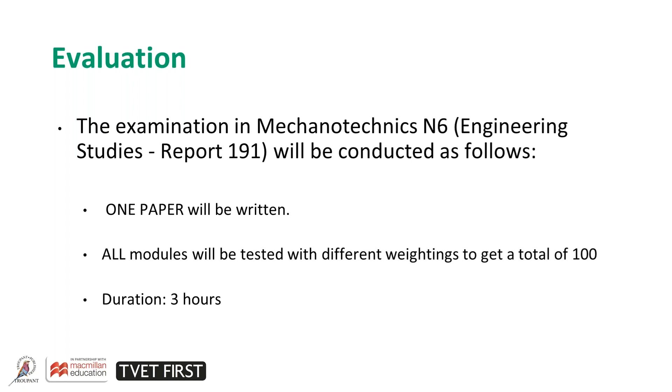In terms of the weightings of cognitive levels, questions will include recall, comprehension, application, analysis, synthesis, and evaluation of all the learning content. These are important aspects in determining a student's knowledge and understanding of the new curriculum.

The following weights are consequently awarded to each category. Knowledge and understanding will count between 10 and 25% of the total marks. Application between 30 and 40% of the examination mark. Analysis, synthesis, and evaluating will count between 20 and 35% of the total marks.

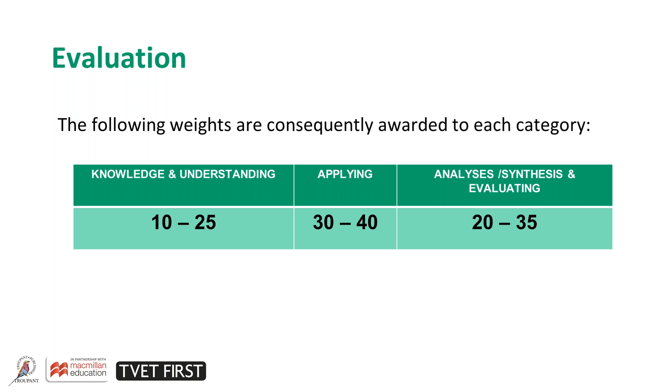At this juncture, I would like to take a minute or two to cover the basic workings of Bloom's taxonomy. This is very important to both learner and educator. In one sentence, Bloom's taxonomy is a hierarchical ordering of cognitive skills that can, among countless other uses, help teachers teach and students learn.

The framework was revised in 2001 by Lorin Anderson and David Krathwohl, yielding the revised Bloom's taxonomy. The most significant change was the removal of synthesis and the addition of creation as the highest level of Bloom's taxonomy. Being at the highest level, the implication is that it represents the most complex or demanding cognitive skill, or at least a kind of pinnacle for cognitive tasks.

There are many reasons for the popularity of Bloom's taxonomy. For now, it's clear that many educators love it because, among other virtues, it gives them a way to think about their teaching and the subsequent learning of their students. The framework can be used to create assessments, evaluate the complexity of assignments, increase the rigor of a lesson, simplify an activity to help personalize learning, design a summative assessment, plan project-based learning, frame a group discussion, and many more, because it simply provides an order for cognitive behaviors.

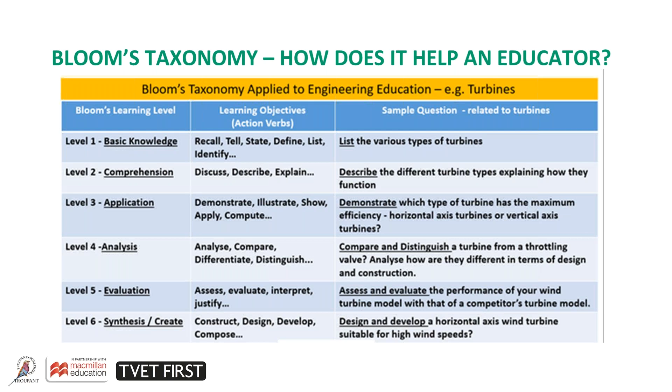Let's look at the changes that are made to the new revised curriculum. We will do this by going through the outcomes of each module and by highlighting the changes per module.

Topic 1 covers the learning area of clutches. It has a weighting of 10% in the final examination. The general aims of this module is to ensure that students are able to identify primary functions of clutches, understand the theories of plate and cone clutches, and to do advanced calculations from basic principles.

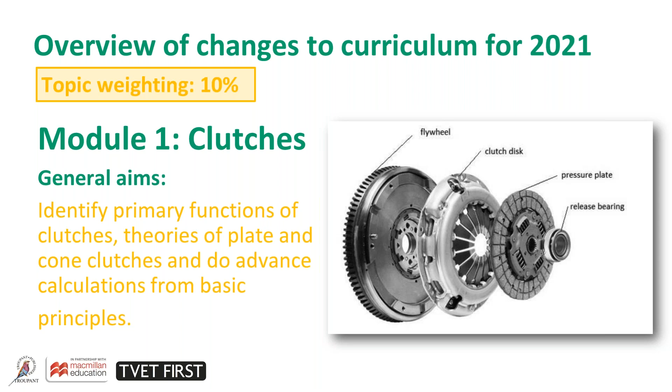Looking at the learning content and specific learning outcomes for this module, as outlined by the curriculum document, we can identify some of the changes that have been implemented. Let us go through the learning outcomes for Module 1 so as to gain a better feel for the content adjustments.

Under your learning content functions, students should be able to draw and label a multiplate clutch. They must also be able to explain the uniform wear theory and the uniform pressure theory.

In terms of advanced calculations from basic principles, students must be able to calculate the force required to press the plates together, the number of contact pairs required in a plate clutch to apply the required pressure, the combined speed between the engine and the shafts at the moment of no slippage, total time of slip, total time of a shaft to reach certain speeds.

They must also be able to calculate torque, retardation torque of an engine or shaft, and combined speed.

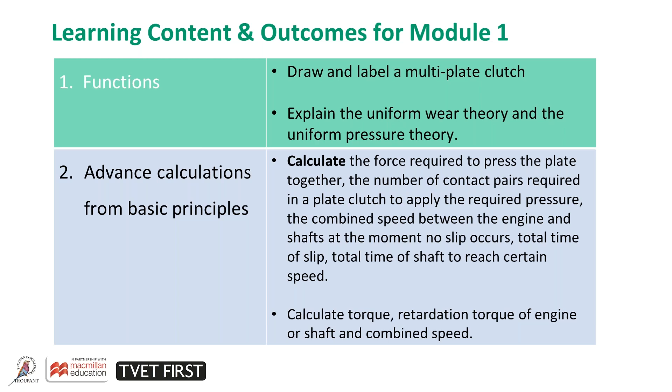Under the learning content of the theory of plate and cone clutches, plate clutches, and conical clutches, the students are required to be able to define conical clutches and explain their applications.

They must also be able to calculate various physical quantities such as torque, the total axial force to engage the clutch, moment of inertia, angular velocity, angular acceleration, time, the maximum pressure, and pressure for the inner and outer diameters.

Looking at centrifugal clutches, students must be able to describe and explain the application of centrifugal clutches, calculate centrifugal force, forces on springs and frictional forces, calculate torque, angular velocity, mass of shoe, or power.

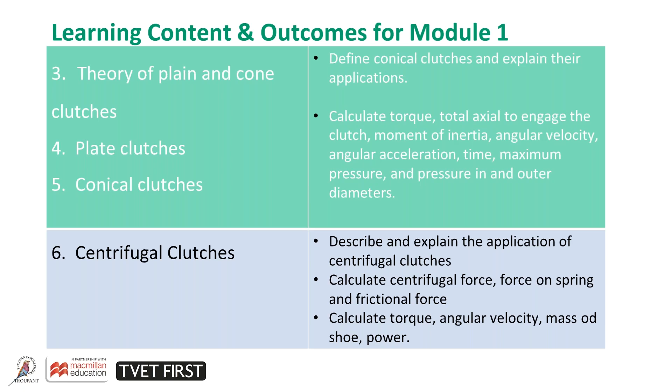Topic 2 covers the learning area of brakes. It has a weighting of 10% in the final examination. The general aims of this module is to ensure that students are able to identify and know the primary functions of brakes. They must be able to distinguish between the different types of brakes and do advanced calculations from basic principles.

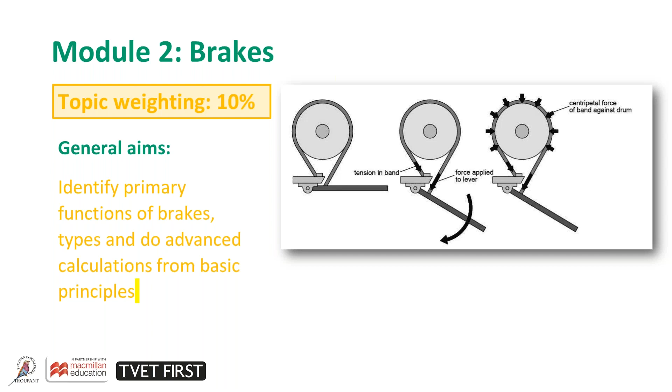Going in some detail of the learning outcomes for this module, students must be able to explain the basic principles of brakes. They must be able to list the design elements that are applied in brake design.

Looking at band brakes, students must be able to list and explain the two types of band brakes. They must be able to draw a labeled diagram which shows the theory applicable to flat belt drives and centrifugal forces. They must be able to calculate physical quantities such as the tension ratio, torque, moments, power, vertical components, number of revolutions, time, angular velocity, the work done, and the minimum coefficient of friction.

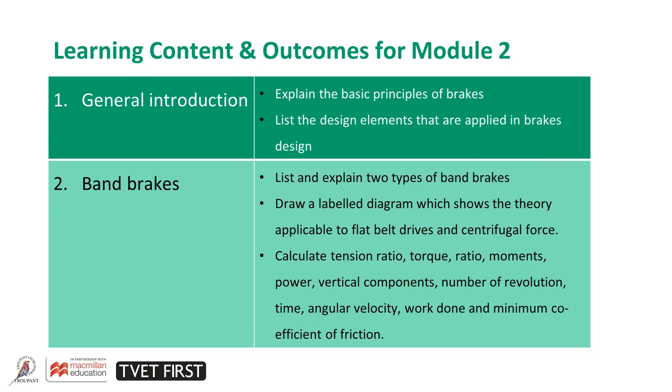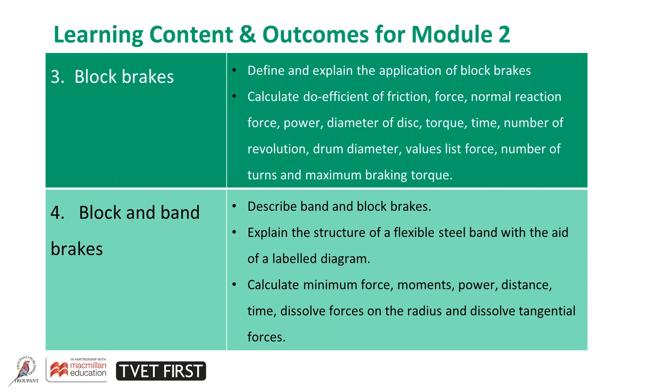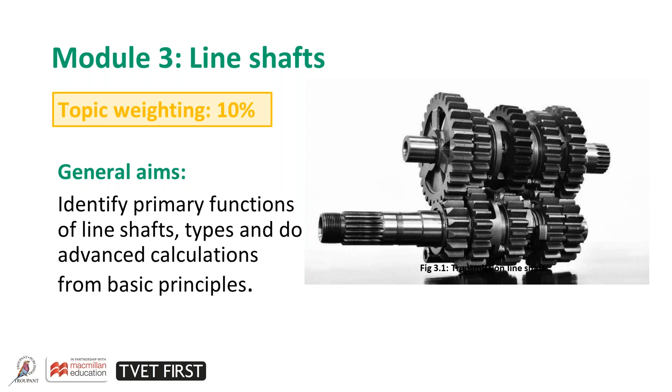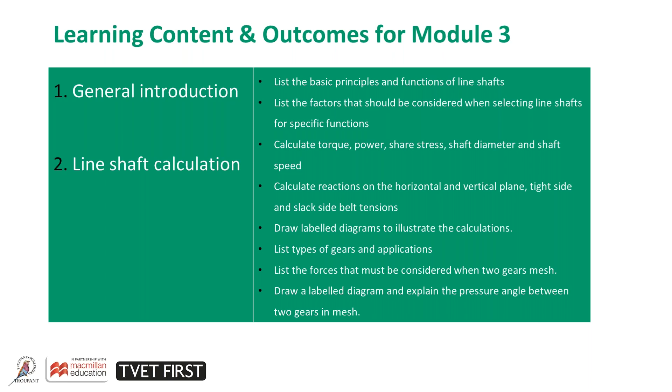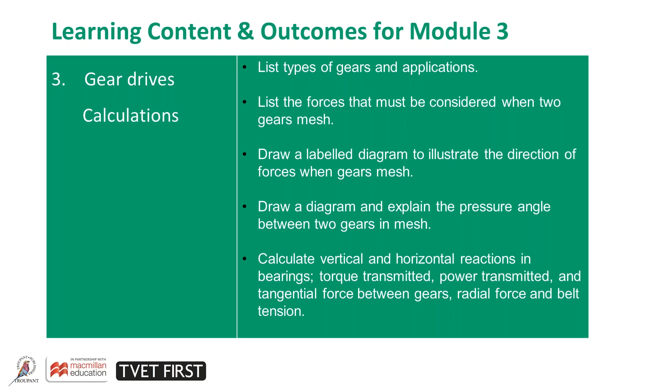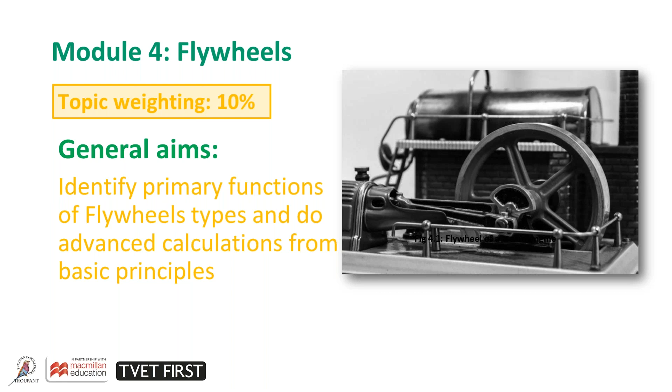Looking at Module 4 in detail, we find that the student will be required to perform an array of calculations to find various physical quantities. The learning outcomes for Module 4 are as follows. Students should be able to list the basic principles and functions of flywheels.

So as we can see, colleagues, there's a huge array of calculations that students must be able to perform in this module.

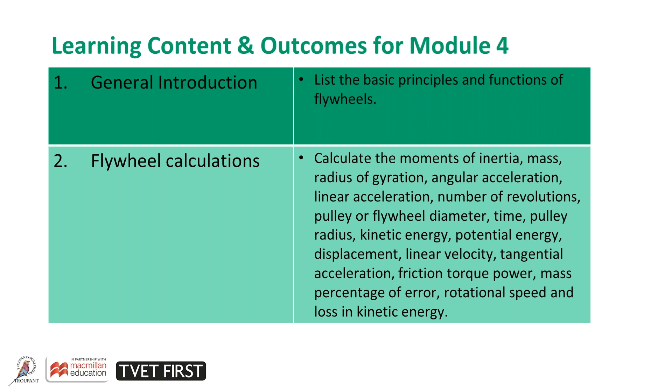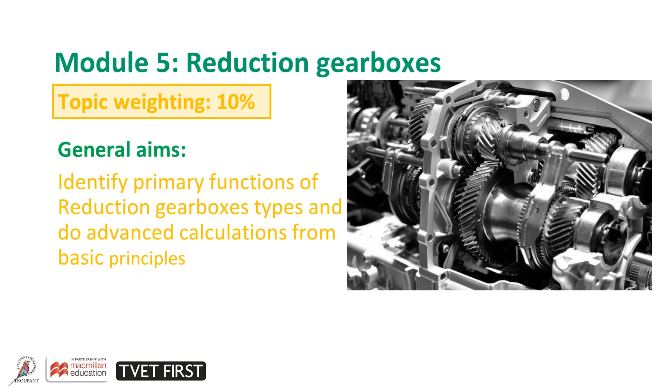The learning content and outcomes for Module 5 are as follows. Students should be able to list the basic principles and functions of reduction gearboxes. They must be able to draw a label diagram to illustrate wheel and pinion in a gear train. They must be able to define the term gear train and give examples of gear trains and give their applications as well.

They must also be able to calculate physical quantities such as torque required for acceleration, efficiency of gears, equivalent moment of inertia, input and output torque, resisting torque, and the total kinetic energy.

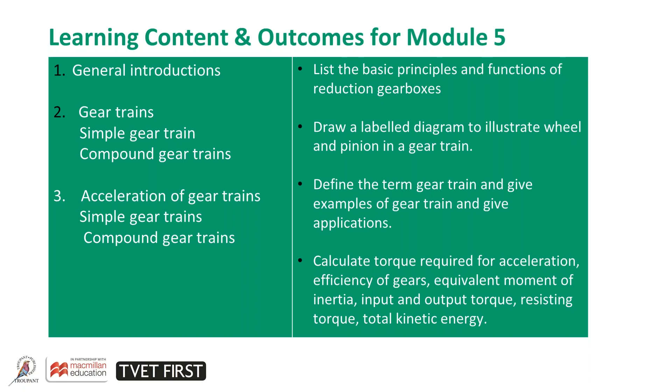If we look at the learning content where we look at acceleration of gear trains, and we will look at the simple gear trains as well as the compound gear trains, students should be able to explain the working principle of worm gear drives. They must draw well-labeled diagrams to show single start worm and double-threaded worm gears.

They must be able to calculate the PCD, peripheral velocity, end thrust, and number of teeth on the worm wheel, gear ratios, center distances, reduction gear efficiency, and frictional torque.

They must also be able to calculate the number of threads on worm gears, effort, distance moved, and velocity ratios.

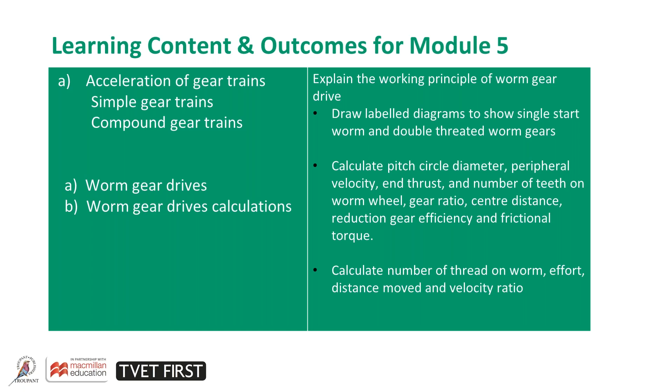Module 6 covers the content of rail traction and vehicle dynamics. This module was introduced in the N5 curriculum and carries forward to the N6 curriculum. It has a weighting of 15% in the final examination. The general aims of this module is to allow students to identify primary functions of rail traction and vehicle dynamics, and also to do advanced calculations from basic principles.

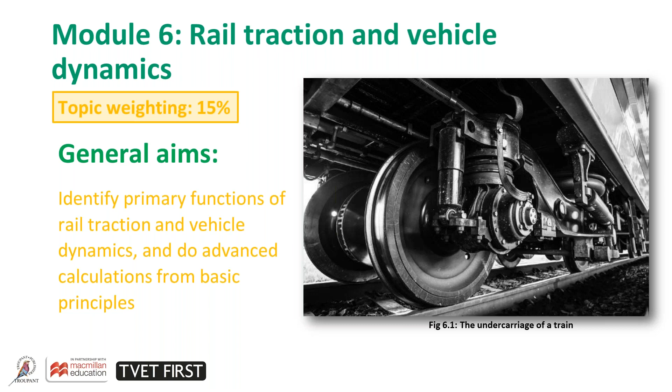If we have to look at the learning content and outcomes for Module 6, students should be able to list the basic principles and functions of rail traction and vehicle dynamics. They must be able to explain the purpose of ballast and automatic track lining machines, explain the effect of centrifugal forces on vehicles traveling around curves.

They must also be able to explain the meaning of the following terms: rolling resistance, inclined resistance, acceleration force, components of weight parallel to the incline, and acceleration forces. They must also be able to define locomotive tractive effort and drawbar pull.

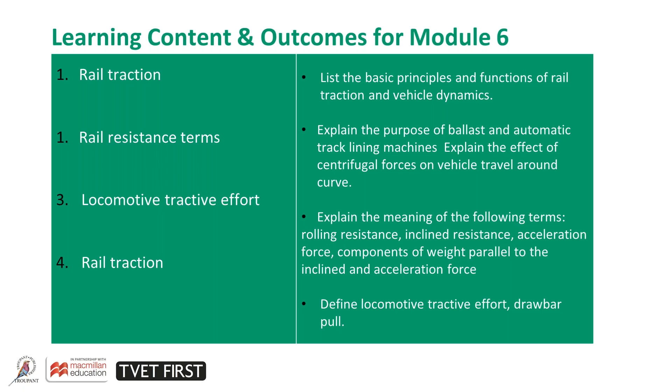For calculations, students need to be able to calculate the speed on level tracks, acceleration, deceleration, upward movement and downward movement for constant acceleration and deceleration, total locomotive force, wheel speed, locomotive tractive effort, locomotive power, tractive resistance, acceleration force, time, average power developed, the drawbar pull,

grade resistance, braking forces, energy dissipation, retarding force, axle torque, gear ratio, velocity ratio, number of drives, mass, transmission losses, and maximum speed.

Under the learning content of skidding and overturning on curved tracks, which was also covered in the N5 curriculum, students should be able to list the formula quantities, symbols, and basic SI units of measurement used on skidding and overturning on curve calculations. They must be able to define the following terms: unbanked and banked tracks, unbanked curves, and banked curves. There's an array of calculations that they should be able to perform.

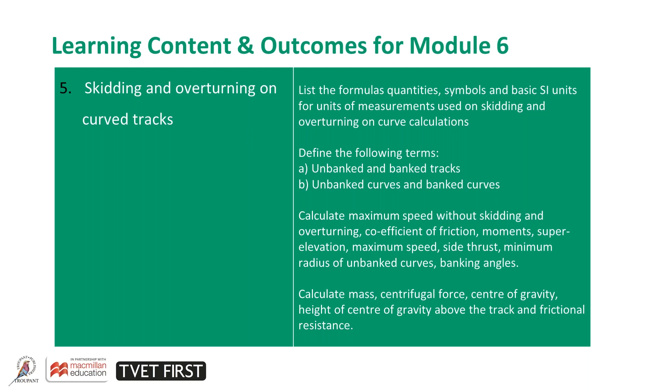Under the learning content for vehicle dynamics, they must be able to list the basic principles and functions of vehicle dynamics. They must be able to list 3 opposing forces that affect tractive effort at constant speed, list the quantity symbols and basic SI units that are used in the calculations on vehicle dynamics.

They must be able to define the following terms: power, tractive effort, engine torque, etc.

And under calculations, they must be able to calculate the input and output power, engine torque, axle torque, tractive effort, gear ratio, transmission efficiency, braking torque, deceleration, engine power on level roads, engine power on inclined planes, angular velocity, magnitude of the balancing couple, angular retardation, load transfer, weight, maximum possible acceleration, and a few others as well.

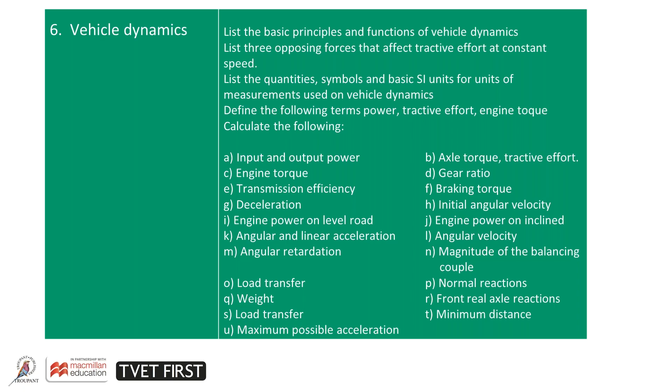Moving on to Module 7, based on static and dynamic balancing. This module has a weighting of 15% in the examination. The general aims of this module is to ensure that students are able to identify primary functions of static and dynamic balancing types, and also to be able to do advanced calculations from basic principles.

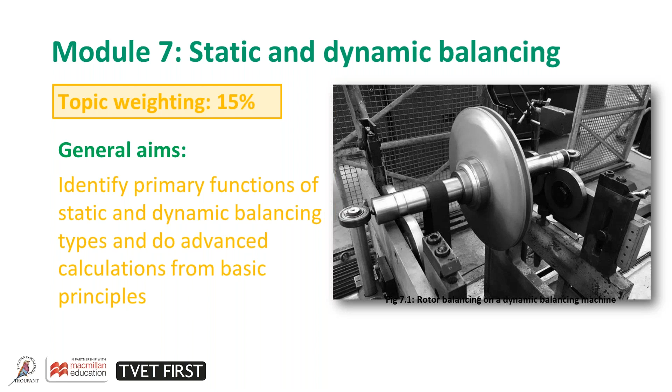Going into detail on the learning content and outcomes for Module 7, the learning content covers balancing of a single rotating mass, balancing of several masses rotating in the same plane, and balancing of rotating coplanar masses. The specific outcomes require the students to be able to explain the concepts of balancing of single rotating masses with the aid of label diagrams.

They must be able to calculate the centripetal acceleration, the thrust on front bearings, centrifugal force, and the balancing of a mass. They must also use labeled diagrams to explain the concepts of balancing of several masses rotating in the same plane. They must be able to explain the static dynamic balance. They must also make use of labeled diagrams to explain the concepts of balancing of rotating coplanar masses.

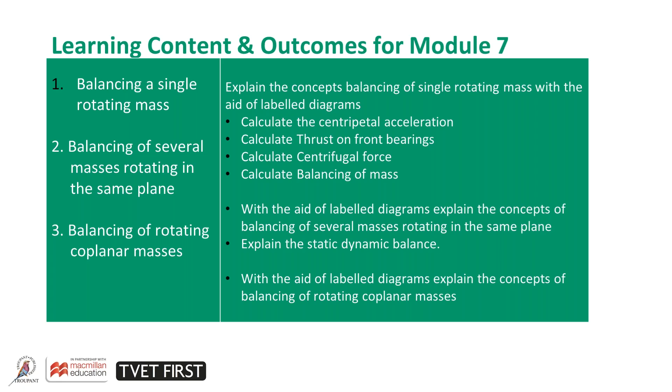Balancing of masses rotating in different planes, where we will focus on Dalby's method. Students must be able to, again, with the aid of labelled diagrams, explain the concepts of balancing of several masses rotating in the same plane, and with the aid of labelled diagrams, explain the concepts of dynamic forces at bearings.

They must also be able to perform calculations such as the axial distance between planes of revolution, angles, and masses. They must be able to construct couple polygons and force polygons. They must also be quite adept at calculating the value of couples, dynamic loads on bearings, relative angular positions, distance, value of unbalanced couples, and magnitude of bearing reactions, direction of reactions, and minimum and maximum vertical forces.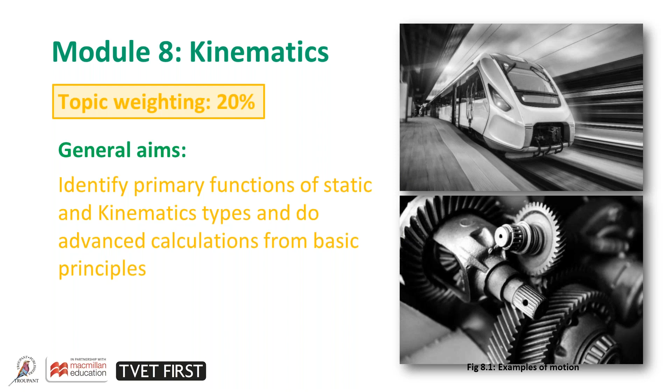Going into more detail of the learning content and specific outcomes for Module 8, if we look under the learning content of motion, specifically the students should be able to define the concept of relevant motion. They must list 3 quantities of motion, list 3 types of motion, use label diagrams to explain the difference between linear motion and angular motion.

They should be able to define the following terms also with the aid of diagrams: machine kinematics pairs, mechanisms, inversion, relative velocity, acceleration, kinematic chain, 4-bar chain, and the slider crank chain.

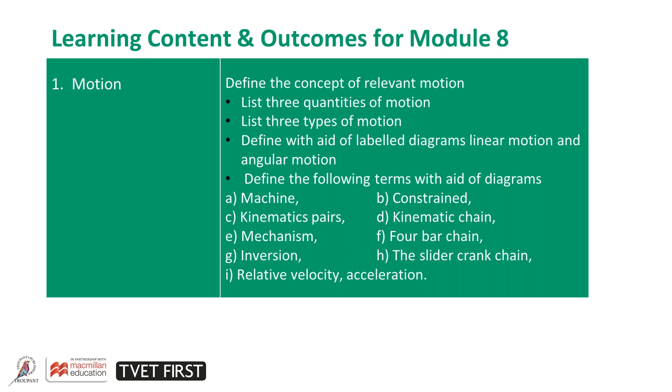Under the learning content of relative velocity and acceleration, centripetal and triangular acceleration, learners are specifically required to be able to define the terms centripetal and angular acceleration. They must also be able to draw diagrams and show the calculations for centripetal and angular accelerations. They must be able to calculate tangential accelerations, calculate centripetal and tangential components.

They must also be able to define the terms centripetal and triangular acceleration. They must make use of label diagrams again and apply the calculations for centripetal and triangular acceleration. They must be able to calculate tangential acceleration and calculate the centripetal and tangential components.

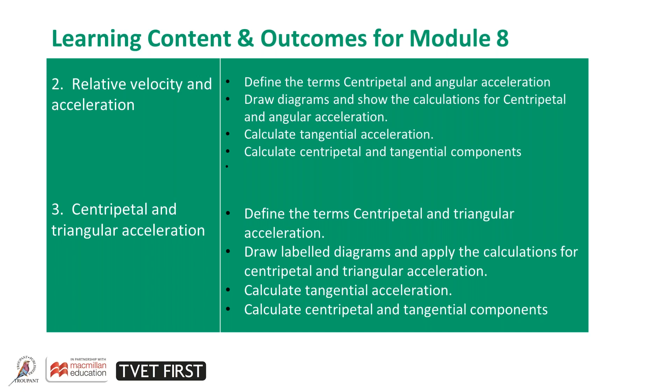Under the learning content of acceleration links, students are specifically required to be able to define the concept of acceleration links. They must draw and label acceleration diagrams, label the parallelogram of forces on centripetal and tangential diagrams, calculate velocity, angular velocity, and angular acceleration, and also indicate the direction of rotation.

They must be able to draw a labeled perpendicular and horizontal line on the acceleration diagrams, calculate linear velocity and linear acceleration. They must be able to sketch a fully labeled space diagram according to scale and find the instantaneous center, draw and label a velocity and acceleration diagram, and apply the angular acceleration of links and linear acceleration of sliders. They must also be able to draw a fully labeled velocity diagram and apply vertical velocity.

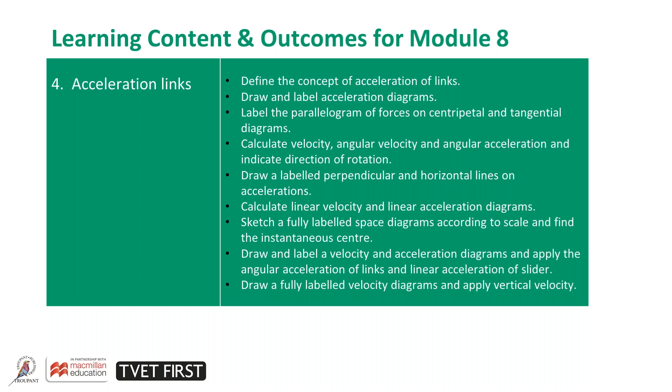A few suggestions of some of the ways the curriculum needs to be presented so as to achieve the desired outcomes envisioned in the curriculum. The theoretical principles should be applied to practical real-life situations. Discussions and evaluations should be done on the basis of real practical workshop situations.

Although the art of effective listening could be formally introduced and refined in oral work, it should be practiced continually and become part of the student's way of life. Excursions, videos, and interviews could all contribute to an understanding and evaluation of the Mechanotechnics curriculum.

Having a look at the Macmillan TVET First Mechanotechnics N6 textbook, the module and units of our book are aligned to the curriculum and use the same topics and subtopics. We're going to take a look at how our book can help you in the classroom. It is full of useful features that will help you and your students to navigate your way through this new curriculum.

Each module starts with an overview box that introduces the content to be covered in the module and lists all the learning outcomes from the curriculum document. This is very useful as it also serves as a gauge for the students to check against to determine their readiness per chapter, as well as for the lecturer to make sure that he or she has adequately covered the content that is required. The overview box is followed by a starter activity, which is normally a class discussion designed to introduce students to the content by relating it to things that they are already familiar with.

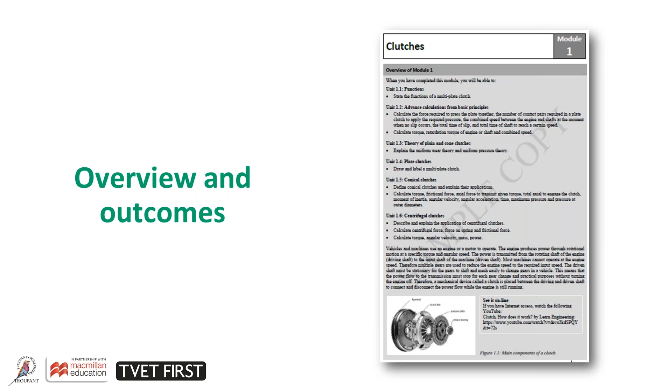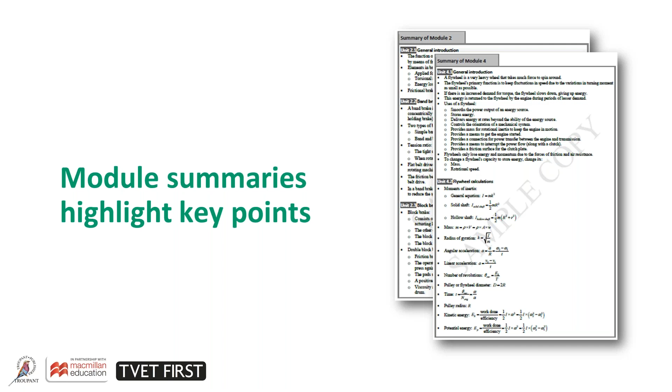A summary of the content of each unit of each module is included at the end of the module, highlighting all the key points. These are excellent revision tools that can be used by the students.

We have used easy to follow explanations in simple language throughout, particularly for difficult sections. In some places, the book goes beyond the requirements of the topic in order to enhance understanding. This trend also allows for the foundation to be laid if a student wishes to pursue the mechanical engineering field in a qualification beyond Report 191.

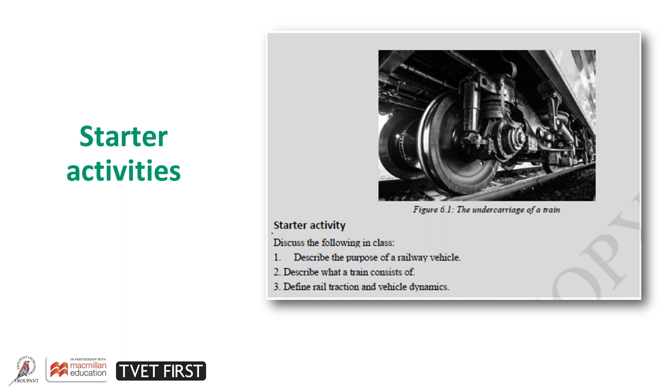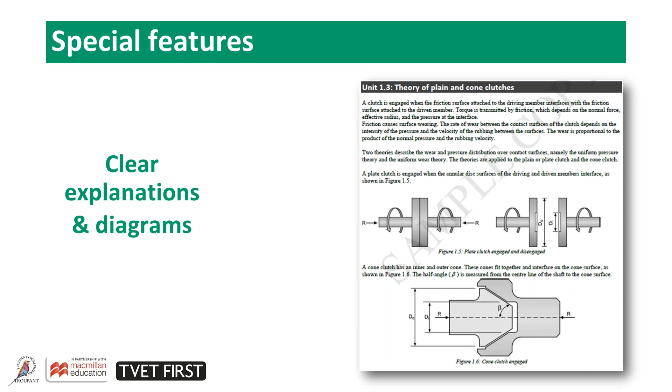The explanations and diagrams are clear and written in a way to promote understanding, and explanations can be followed on the clear diagrams which allow the students to visualize the explanation. Photographs help with students' understanding and link what they are learning to the workplace.

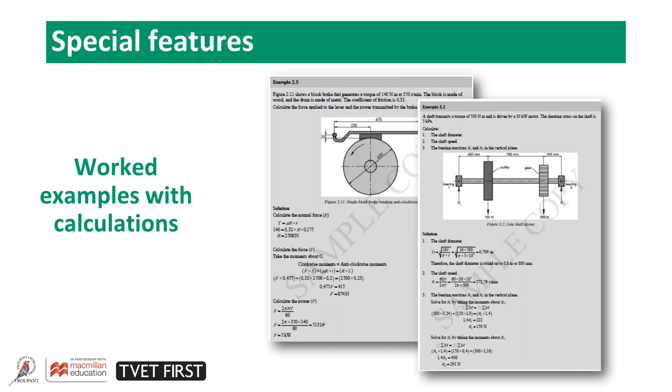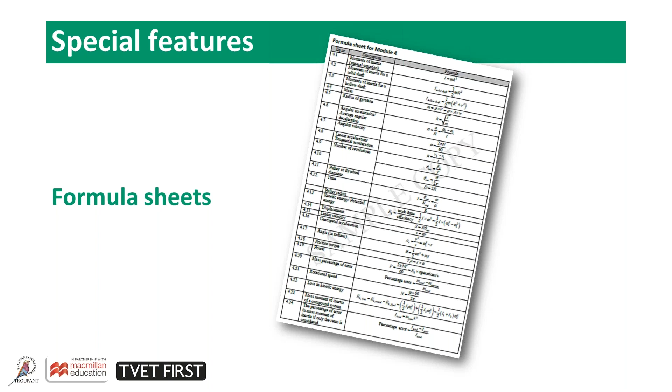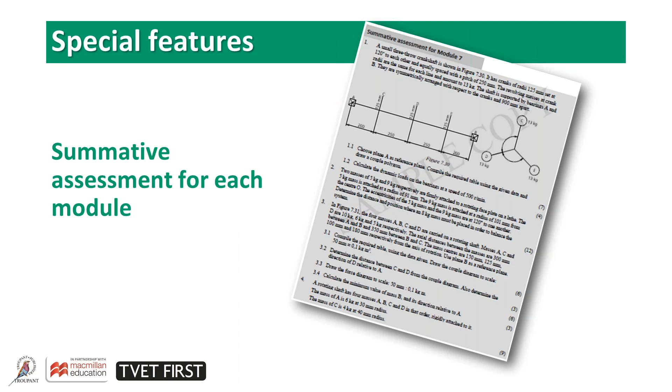The lecturer's guide is also very useful and valuable to you as lecturers. We will briefly go through some of the key features of the lecturer's guide. The lecturer's guide includes some curriculum mapping, which includes a lesson plan template and a suggested 10-week teaching plan so that you can keep track of your content coverage and plan efficiently.

We also have various classroom management tools and preparation tools to ensure that you are efficiently and adequately prepared for the lesson. We also have detailed solutions to all the activities, which are invaluable to you as a lecturer and will ensure that your students are able to achieve their full potential in this instructional offering.